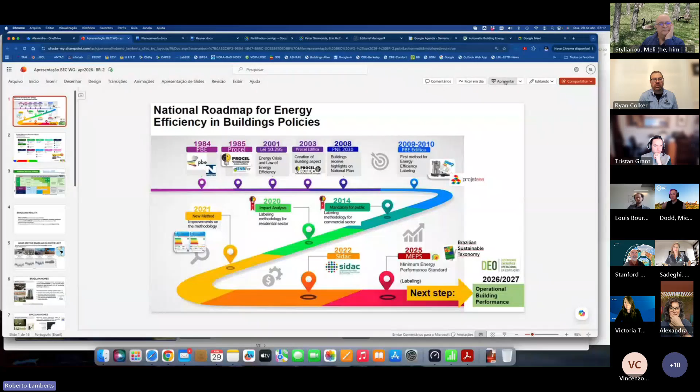Yep, Alexandra - oh thank you Lamberts. So we've brought our timeline about the implementation of our regulation policies. Although we've had a labeling program since the 80s in Brazil, it was only in 2009 and 2010 that we actually published the methodology for the energy efficiency label for buildings, and it was a voluntary program. But since last year, we've published a new regulation in 2025 that established MEPS, minimum energy performance standards, for buildings, and the instrument to demonstrate compliance with the MEPS will be the label. This label is conceived only for projects, after the building is built or retrofitted. We are also now working on a regulation or certification program for existing buildings, for buildings in operation - this is our DEO program, which is our next step.

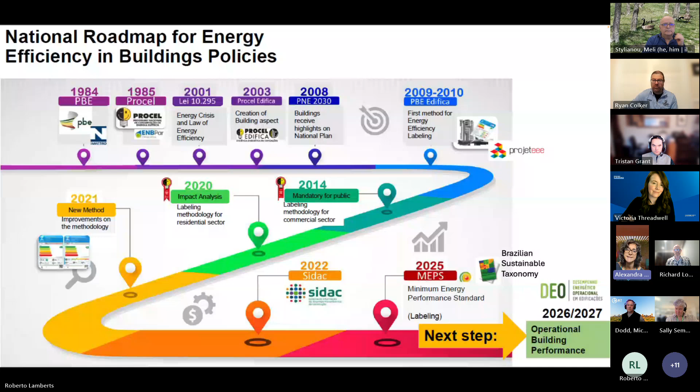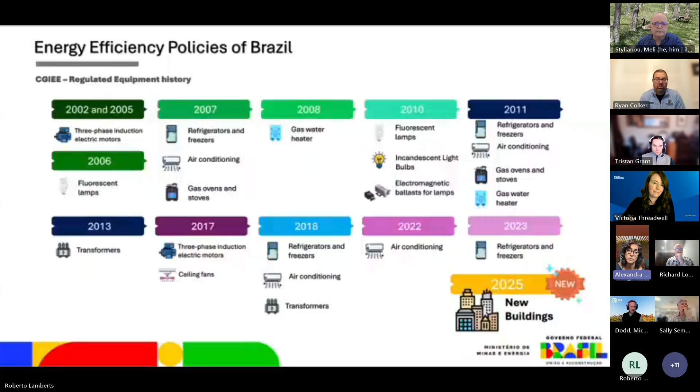Next slide please. This is our history on establishing MEPS for appliances and equipment here in Brazil, and it was the first time we established MEPS for buildings last year.

Next slide please. This is our timeline for establishing these MEPS. We are going to start with public buildings in 2027 - the MEPS for public buildings will be level A for energy efficiency. From 2035, this minimum standard will be NZEB, so the buildings will not only have to reach level A, but will also have to attend at least 50% of their primary energy demand with distributed energy, with renewables installed locally. For private buildings, the minimum standard, the MEPS will be level C.

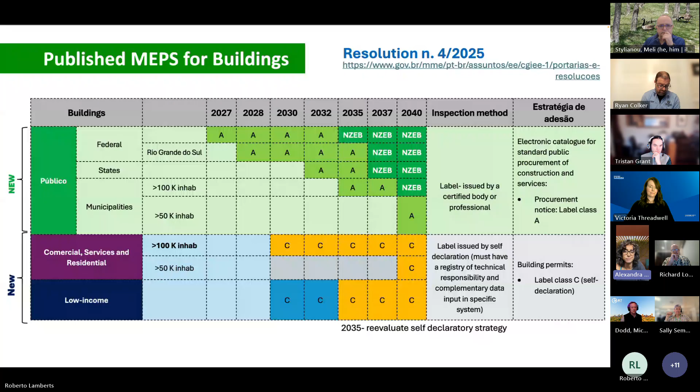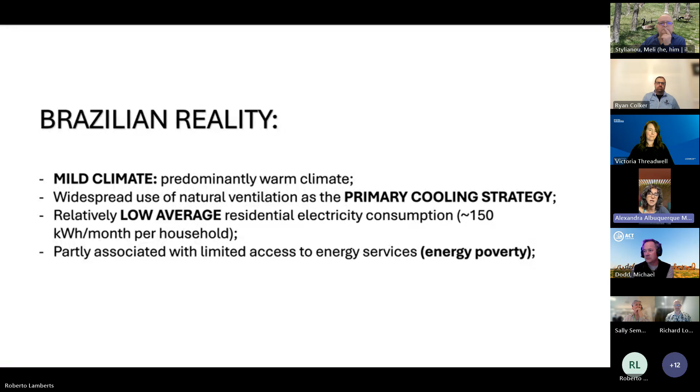This is just for you to understand our main scenario here in the country. Most of the country presents a warm climate, with widespread use of natural ventilation as the primary cooling strategy, and relatively low average residential electricity consumption, around 150 kilowatt hours per month. This is partially associated with limited access to energy services, related to energy poverty.

Our climates are very different because we are a very big country. We are the only country in the world crossed by both the equator and the Tropic of Capricorn. So in the south of Brazil we have periods of the year very cold, where we have kind of snow, if we can say that. And we also have desert climates in the northeast of Brazil.

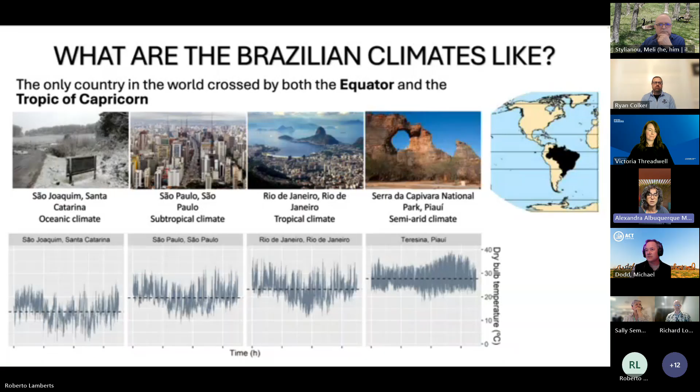Considering our housing sector, the envelopes are usually non-insulated. The low-income sector represents approximately 33% of residential buildings in Brazil. The most common building systems used are ceramic bricks in the walls, ceramic tiles in the roofs, but we also have concrete roofs and walls, fiber cement corrugated sheets, and single clear glass. All these systems are considered in our national standard for building performance, standard 15575.

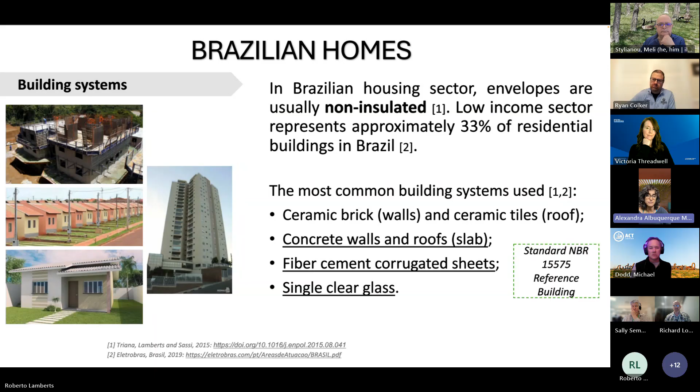There was a survey which was very interesting because it showed us that regarding cooling preferences, 89% of occupants here in the country prefer naturally ventilated environments at home, and air conditioning is mostly used during the night.

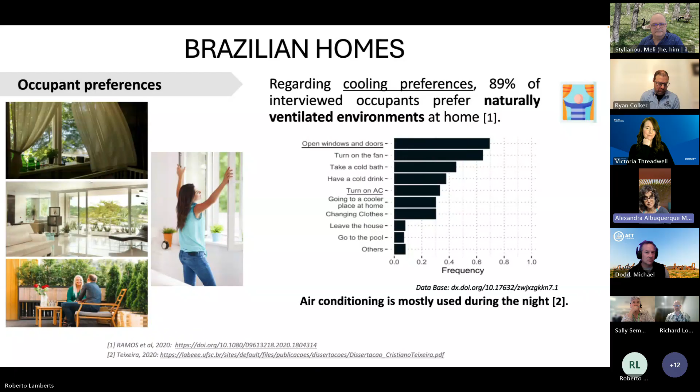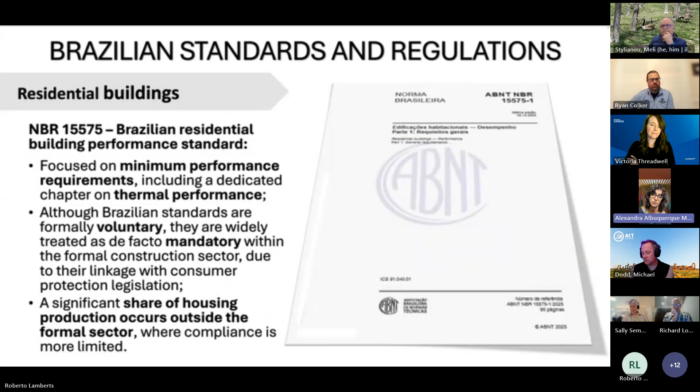Our national standard here in Brazil applies just to residential buildings. We are about to publish a similar standard for commercial buildings as well. This standard is focused on minimum performance requirements, including a chapter dedicated to thermal performance. Although the Brazilian standards are formally voluntary, they are widely treated as mandatory within the formal construction sector due to their linkage with consumer protection legislation. But a significant share of housing production occurs outside the formal sector, where compliance is much more limited.

We also have the label. Because we published last year this regulation that established the MEPs adopting the label as its main instrument to show compliance, the label is actually going to become compulsory, an obligation, because they will have to adopt this.

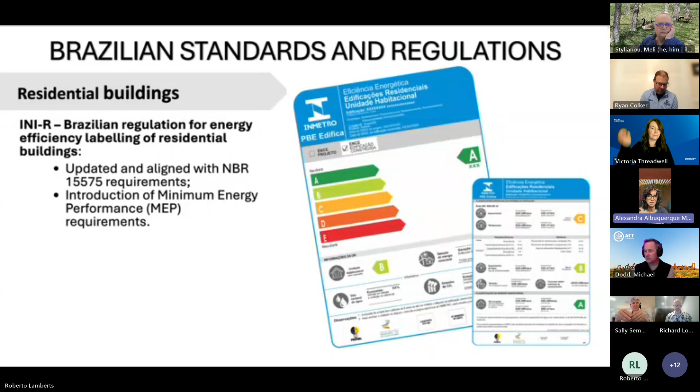Considering our national standard, there was a review in 2022, and in the thermal performance chapter we had some challenges to accomplish. We tried to make a description of occupant behavior when modeling hybrid strategies, because it was very important to consider the naturally ventilated period. So the simulations using a reference building had to integrate these different periods using natural ventilation and using air conditioning.

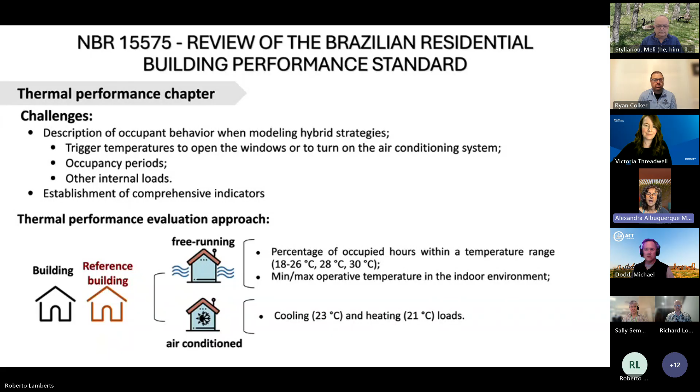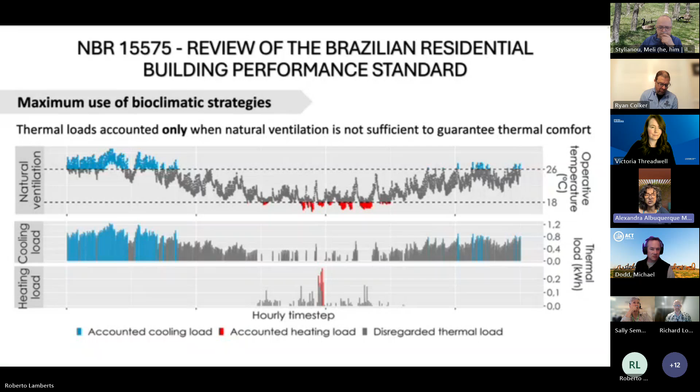We tried to use the maximum use of bioclimatic strategies, so the thermal loads are counted only when natural ventilation was not sufficient to guarantee thermal comfort. These are some of the strategies that we tried to integrate and use to make adjustments in this standard.

But we are still using, as the title says, the climate from the past, because we make the simulations using our climate data, not considering the changes that we are passing through. The acceptable indoor operative temperature limits are defined as a function of the annual mean external dry bulb temperature. The simplified adaptive framework adjusts thermal performance criteria according to the local climate, allowing higher indoor temperatures in warmer conditions. So we are very used to much warmer temperatures in our environments than you are used to.

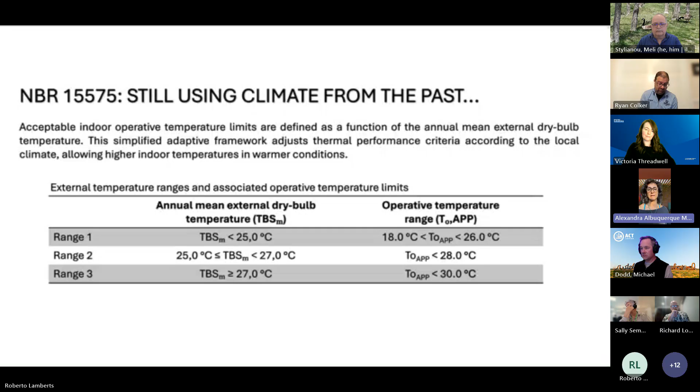We've brought some evaluations done in this study, where we studied three case studies with three different envelopes that are usually adopted here in residential buildings, using a human thermoregulation model to understand the difference between simulations using climate data and simulations using projections of the climate.

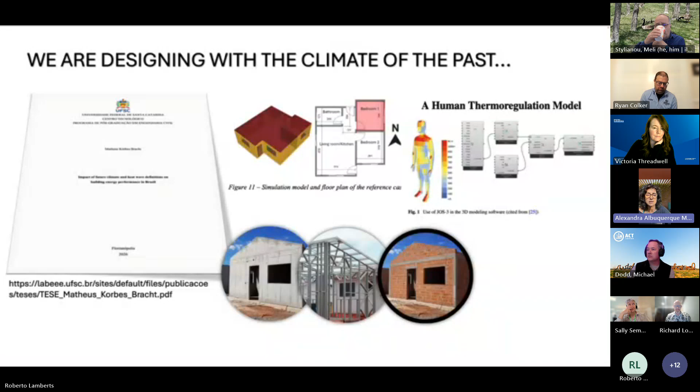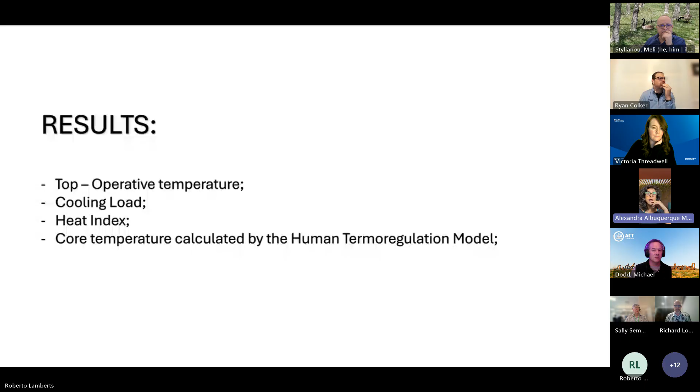We tried to understand the behavior of these case studies using as a reference four different indexes. And this is the last slide that we've brought to show to you today.

It shows the results of this evaluation that showed us that we have to make some adjustments in all the studies we proceed, and that will be used to adjust our regulations and try to make these evaluations using this future climate, because here we can see the big differences in these indexes when we use the history of our climate until now, and when we use these projections of future climate.

So we can see here the differences in these 3 case studies between these 2 different climates, like Brasilia, here where I am, which has a very mild climate right now, and Manaus, which is very hot and humid, and how it's going to be in the future by 2050. This highlights the importance of making these studies to design buildings considering the climate change we are going to face.

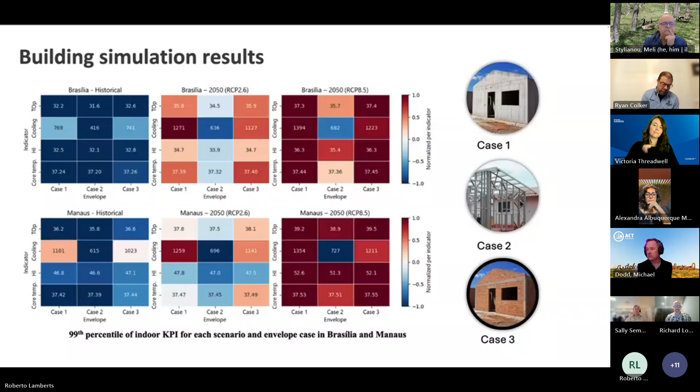So I think that's it. Thank you very much. We are here to discuss with you later.

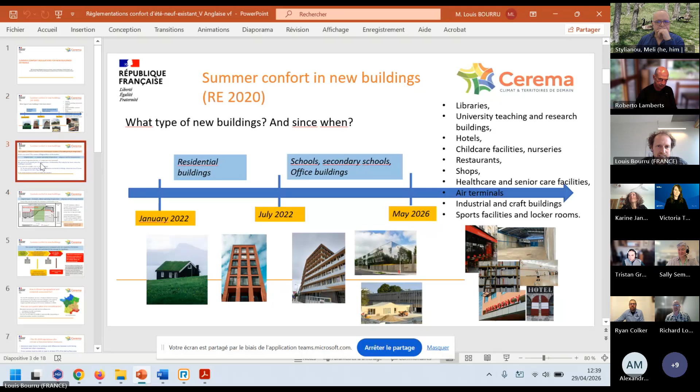So what is the metric we use for overheating for new buildings? First, our regulatory verification is based on simulation only during the design phase. We don't have measures like every country, I think. We use the number of degree hours of discomfort, which I will explain. It's a calculation for the whole year. We add all these degree hours of discomfort for hot periods, but only for the hours when the building is occupied.

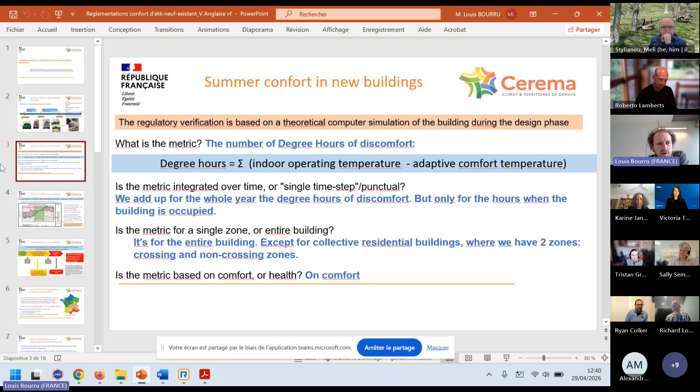We consider the entire building, and we have 2 zones only for collective residential buildings: a crossing zone and a non-crossing zone, regarding the openings and the natural ventilation. Our metric is based on comfort only, not on health.

So what are these degree hours? It's the difference between indoor operating temperature and an adaptive comfort temperature. Every hour we test if the situation is comfortable or not, and whenever the operating temperature exceeds the comfort threshold, we record the excess in our DH meter.

Our limit for comfort is adaptive only for days - it's between 26 and 28 degrees. At night we don't have the adaptive comfort, we put the limit at 26 degrees. Each time we exceed the comfort limit, we add the temperature exceedance, and by adding up the degree hours for each day, we get the annual degree hours.

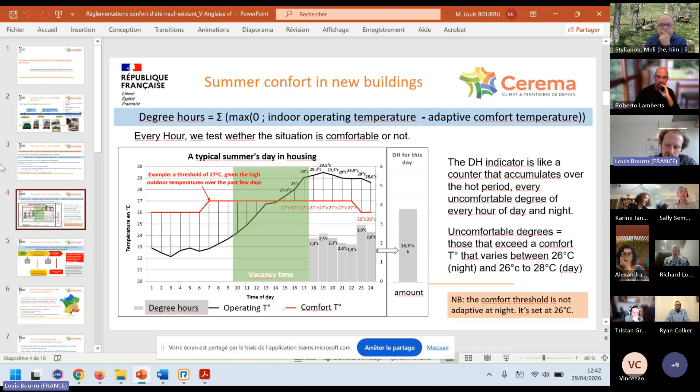This annual total of DH is compared with our two regulatory thresholds: 350 degree hours and 1250 degree hours. If your total is below 350, the building is expected to be comfortable during hot weather. If your total is above 1250, the building does not comply with regulations, and you must review the design before starting construction.

If you fall between the two - the yellow zone - the software will calculate a virtual cooling charge, a potential air conditioning consumption penalty, which will be added to our energy consumption indicator. This will therefore penalize you in terms of compliance with the consumption threshold. This is because we assume the user may eventually install air conditioning in the building at a later date. This consumption penalty is proportional to the amount by which the 350 degree hours are exceeded.

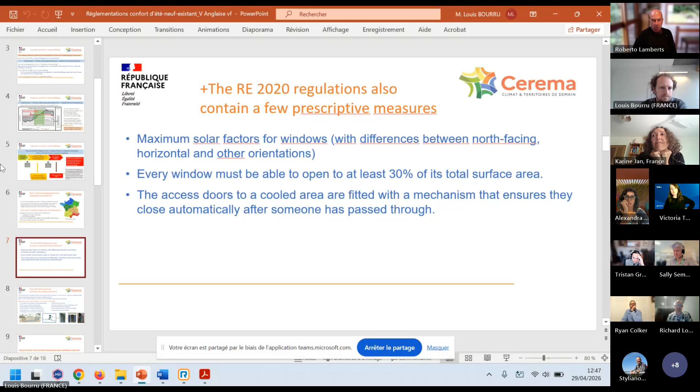We make these simulations on official software, and during the simulations the air conditioning is turned off, but the temperature simulation takes into account all the passive or semi-active systems installed in the building. This is new for us, because in the last regulations before RE 2020, these systems were not taken into account.

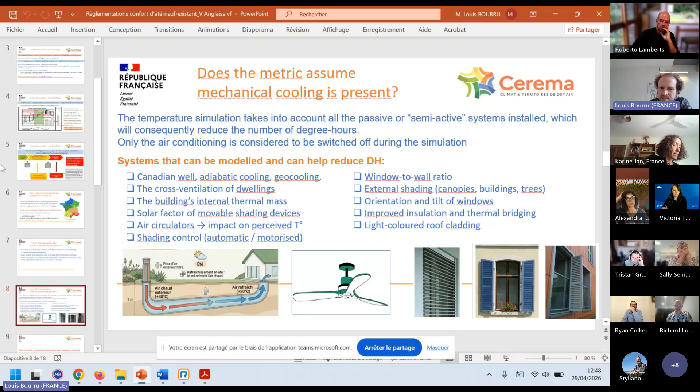So we have this system, we can use it now to reduce the degree hours, such as Canadian well, external automatic shadings, or geocooling, and so on. So now, Karine, if you want to explain existing buildings.

Yes, I will talk about the regulation for existing buildings, which is less modern than the part presented by Louis, because also in France we always start by regulating new buildings, and then we work on existing buildings.

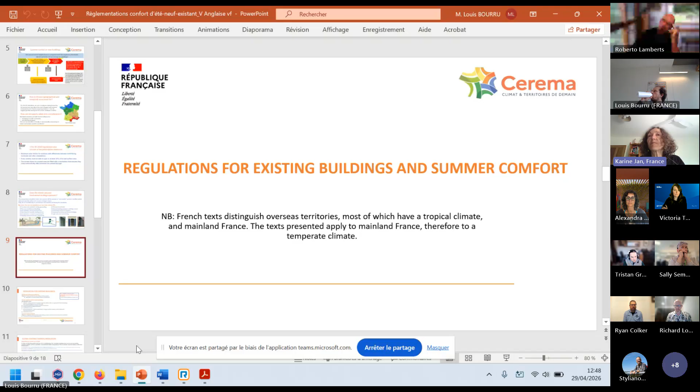Our regulation on global renovation is the method from before our last regulation for new buildings. So for existing buildings, we have several regulations.

We have the energy performance certificate, which is, I think, European - there are equivalents in Europe. It's an obligation to display performance when you are selling or renting a property. This regulation briefly points out the summer-related attributes of performance - you have or you don't have this attribute, and then you have points.

There is a thermal regulation for existing buildings, which has two modes of application. One is global, when there is renovation of a property, a large property with a cost of 25% of the building's value, and for buildings constructed after 1948, the period in France when construction became more industrial. Then there are several obligations I will detail later, but there is something global and also requirements of means.

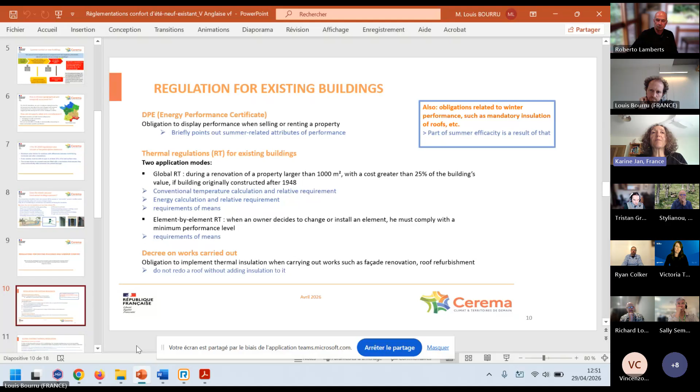Next slide. So the global existing thermal regulation for a project on a large building - the aim is to limit discomfort and to limit the use of air conditioning. So you have to ensure an acceptable summer comfort.

Conventional indoor temperature in summer must be below a reference temperature. The calculation of the temperature reached by the building is conventional - it's a calculation with a method, and this temperature must be below the reference temperature, which is the result of the same mode of calculation for the same building, but correctly protected, in terms of solar factor.

There are also obligations of means. For rooms intended for sleeping, the solar factor of openings must be below a reference, and new openings must be able to open over 30% of the surface. It's partly the same obligations of means as in the new buildings regulation.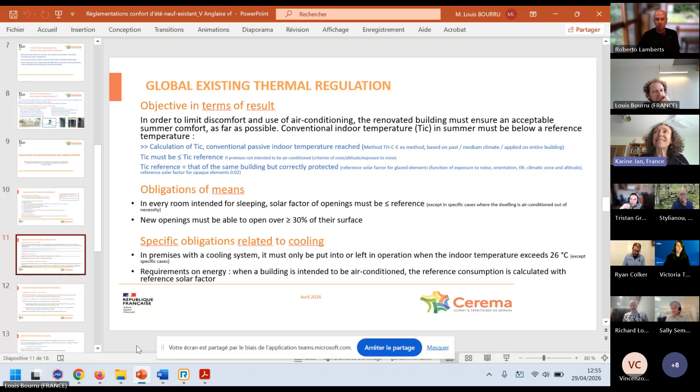Next slide. The existing thermal regulation element by element - the obligation is mainly on solar factors. The solar roof windows must be really protected, with a very good level of protection. And in case you install a cooling system, all equipment must be upgraded for solar protection.

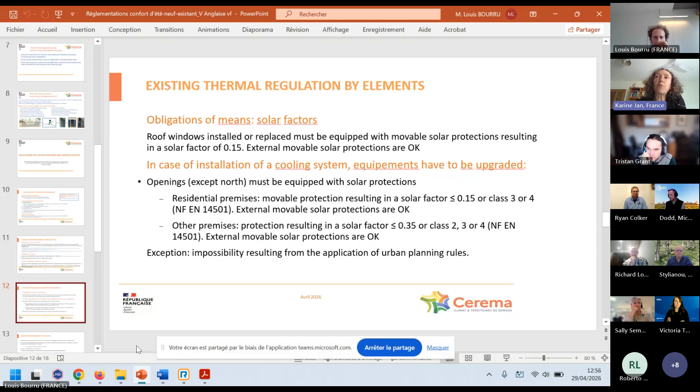The exception is for urban planning rules. In France, we have a lot of old buildings and a very strong defense of the architectural style of old buildings, so it's not always evident to put the proper protections in place. Next slide.

Thank you. And the energy performance certificate - it's the obligation of showing the efficiency level when you sell a property.

There's a list of dwelling characteristics. It's only for residential, for the moment, for the summer question. There's a list of dwelling characteristics that favor summer comfort, so you check if you have or don't have these characteristics. Then you have a level, on a 3-level scale.

So this is all for our continental, our temperate climate. We also have regulations for tropical climate, and what has been said about Brazil is very interesting, because we are dealing with those kinds of questions. For example, for continental climate, if we reinforce the energy performance certificate for summer comfort, it may induce reaction with air conditioning that doesn't show an insufficient performance. And for tropical climate, there are also questions about improving the building for a passive situation, or improving it for an air-conditioned situation. Thank you.

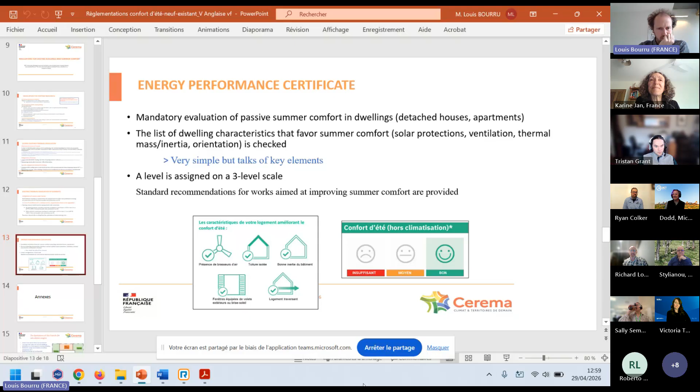Thank you, Karine, it was very interesting again. I noticed there is, before going to you Sebastian, a question from Richard. Oh, before going there, I didn't realize that the Earth Tube is a Canadian well. Interesting.

Rob, Richard asks, how do you account for humidity when using ground source cooling?

We don't, I think. I'm not sure. Humidity? For ground cooling, I don't think we do. No, for the moment we don't. We would have to redo the map of the climate regions for summer, because it was done mostly for winter. There are considerations about solar reception, but not more. Yes, there are parts of France where humidity may be a problem sometimes in summer, but we don't have climate modelizations that talk about this humidity in our regulation, and we don't have this for the future. There's no modelization of humidity for the future. Okay, in France. Thank you, Karine.

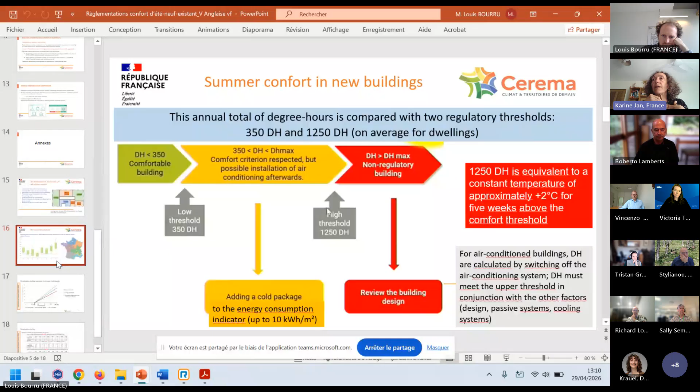For the existing buildings, you've seen the regulation is relative - you compare your building to a building which would be more protected. So the choice of the climate file is a bit less important, but yes, it would be better if we used climate files of the future. And it would be better if we use climate files for new or existing buildings of the future, with the urban heat effect included. I believe in a few years we will manage to do it.

I don't know if it's 5 years, but for new buildings we have a national database since 2022, and here you have the results for the different climate zones. It's very different from one zone to the other. Here in Nantes and Brittany we have the central H2A zone - it's very easy to manage the threshold. But in other zones like where Karine is, in H3, we currently are close to the limit often.

But when we build the regulations in France, we do a lot of simulations with different buildings and different parameters to be sure it will be affordable, technically and economically. So the thresholds are fixed with a lot of simulation before becoming a regulation. But we have sometimes surprises.

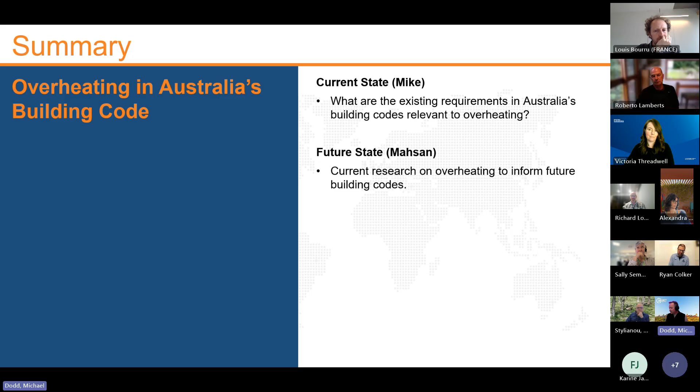So at a high level, in our building code, this is the current regulation - there's what we call a functional statement. H6F1 relates to residential buildings, and it says that a building must improve occupant health by mitigating the impact of extreme heat and cold, and when there is an energy blackout, so if there is no power to the house. That's talking about the passive elements of the house - insulation in walls, performance of windows, and orientation and the like.

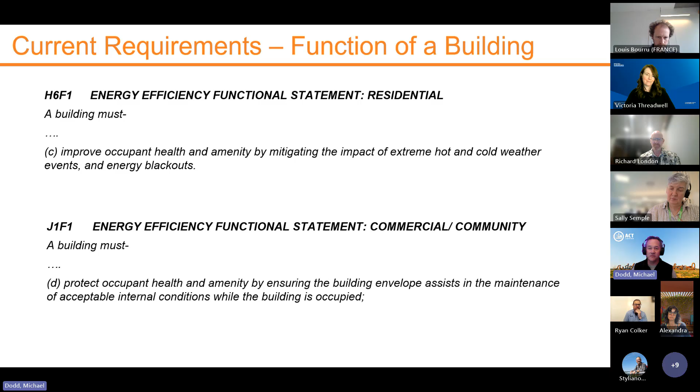It's a general principle that's there in the building code, which the other regulations try to meet. And then for commercial and community buildings or public buildings, again there's some similar wording, which is about maintenance of comfort - really, maintenance of acceptable internal conditions when the building is occupied.

So this is an overview of the residential building requirements. I guess up front I should say there is no overheating requirement within the Australian Building Code - there's no requirement for the building to not overheat. All of these measures I'm talking about are within the energy efficiency requirements, and really energy efficiency requirements to reduce greenhouse gas emissions and reduce energy costs for occupants is used as a proxy for preventing overheating.

Australia has 8 climate zones, just like France, which Mahsan will go into a bit more in her presentation about where they are in the country. You have a differential requirement depending on which climate zone you're in, which is a very common approach. Australia has a wide range of climates from tropical to alpine, with everything in between, from hot desert climates to humid climates. So there's a great range in our building code to respond to all of those climates.

For residential buildings, when we're talking about the modeling that is used to predict how much energy a house will use and what temperature it will be, we've used past climate files. These were updated recently to take into account the most recent few years, but there's still a backward-looking climate file and weather file that was used to both develop the provisions and what's used in our energy modeling process.

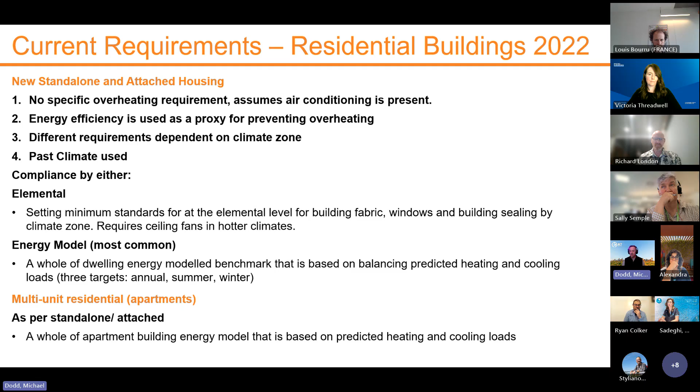In commercial buildings, again, there is no specific overheating requirement, and energy efficiency is used as a proxy for overheating. Minimum standards for the elemental building fabric is similar for residential, but there are more prescriptive requirements required around the air conditioning system used in the building.

So above a certain size, a building is required to have a night purge facility, so it can eject hot air from that building when the building is not in operation overnight. Economy cycles that draw in cooler fresh air are mandatory, but that's more of an energy efficiency requirement. And the more sophisticated your building, the more sophisticated the heating, ventilation and air conditioning controls are required to be.

Most of the commercial and public buildings in Australia will be cooling dominated, so most of their energy will be used for cooling. Partly because of that, most of our commercial and public buildings are required to have light coloured roofs as standard.

The provisions for commercial buildings have just been updated. In fact, they'll be made available for use here in Australia in 2 days' time, on the 1st of May. They won't become mandatory until the 1st of May in 2027. But these new provisions were developed using a future average climate file, so representative concentration pathway, RCP 8.5, 2050 was used to develop our provisions as they will become the minimums going forward.

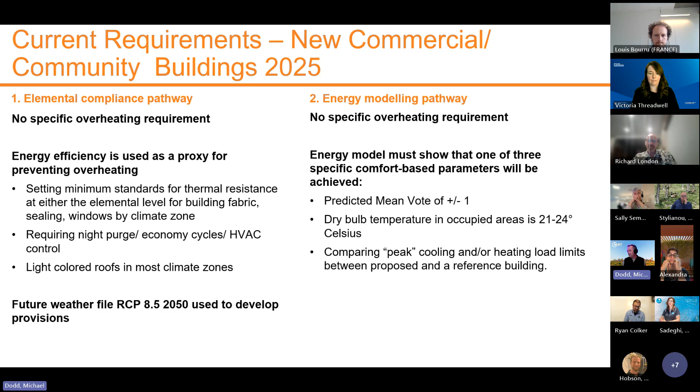The file this was based on was a future heatwave file. This is for Melbourne, which is one of our larger southern cities. It has a very big diurnal range, so in the wintertime it gets temperatures below 0 overnight, but in the summertime it has temperatures above 40 degrees. So it's a very dry heat. And this modeled a 7-day heat wave.

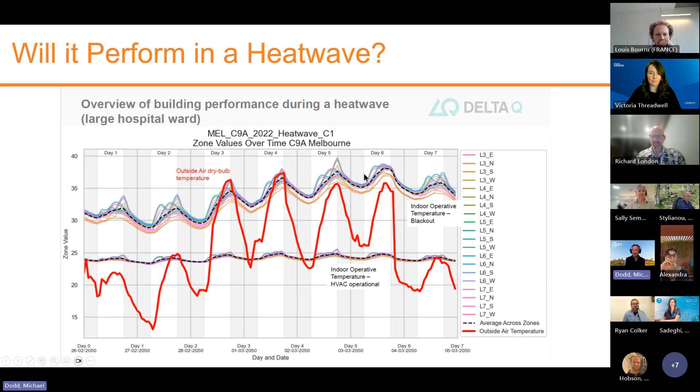So as Michael mentioned, CSIRO is leading a research to develop a residential overheating model for Australia. The objective of the project was first to review the existing international standards and national building codes, then to identify gaps and limitations in current guidelines, and finally to develop a residential overheating model for Australia to be included in the code.

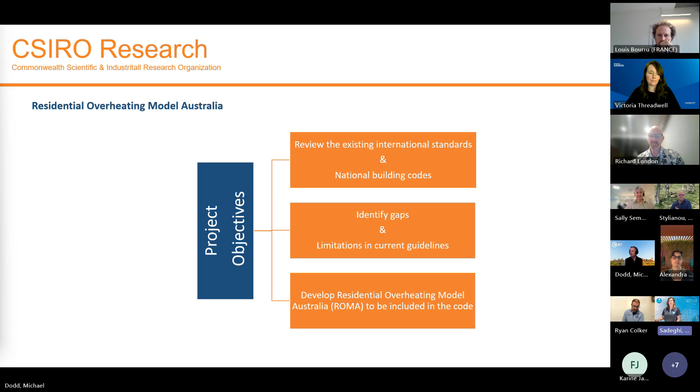In each standard, we looked at the metrics that have been used, and the indices used in these standards. We also identified the threshold limit that each standard has, and the thermal comfort model, for example whether the model is static or adaptive. And we looked at the building type and building operating system.

We also looked at the national building codes of all those countries that are already including overheating and thermal comfort standards in their building code, for example Belgium, Germany, France, UK, Netherlands, and others. We looked at the standards used in these countries, the indices they used, the threshold limit, the thermal comfort parameters included in the building code, and also whether the code is sensitive to occupants' adaptive response, and what the building types and building operation systems were.

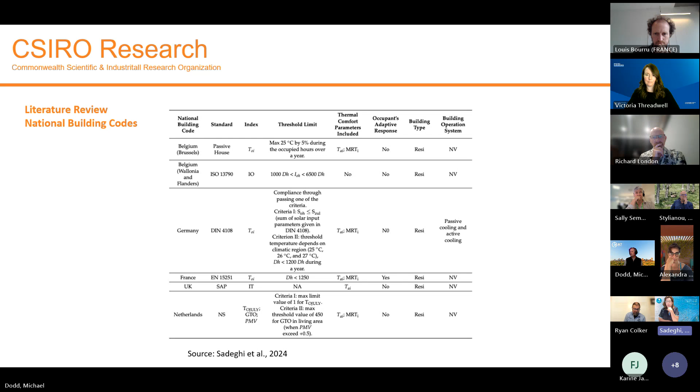So this paper is published, and you can have access to it online. If you are interested, I can give you the details about that.

So the key lessons that we have learned from the literature review - based on these lessons, we have developed our overheating model and criteria based on 3 scopes.

First, the model is an adaptive model, which is sensitive to climate and also sensitive to occupants' adaptive behavior. The index that we are using is SET star, which includes 6 parameters: 4 environmental parameters, including air temperature, mean radiant temperature, relative humidity, and indoor air speed, and also 2 personal parameters, namely clothing value and metabolic rate. The metric that we are using is degree hours.

This is very similar to France, what Louis presented. We are using the sigma degree hours, which quantifies intensity and duration of exposure to heat stress.

As the national project, we collaborated with 5 Australian universities, and each university was responsible to collect measurement data and conduct a field study for us in 1 or 2 Australian climate zones. We managed to collect data for 7 Australian climate zones.

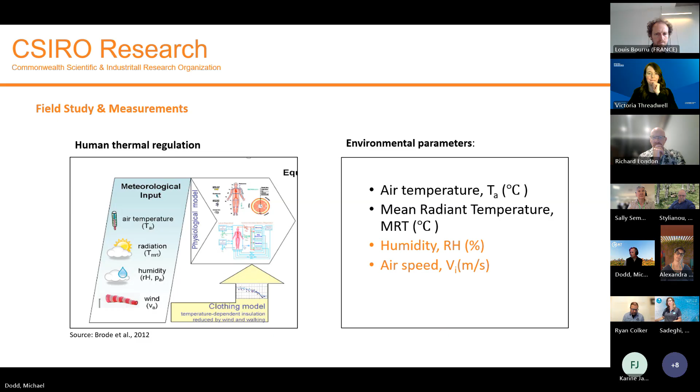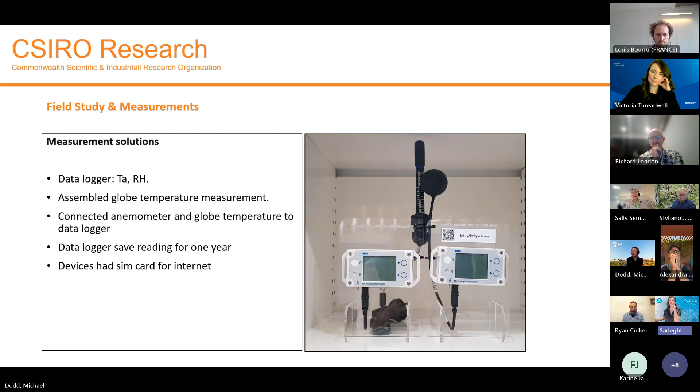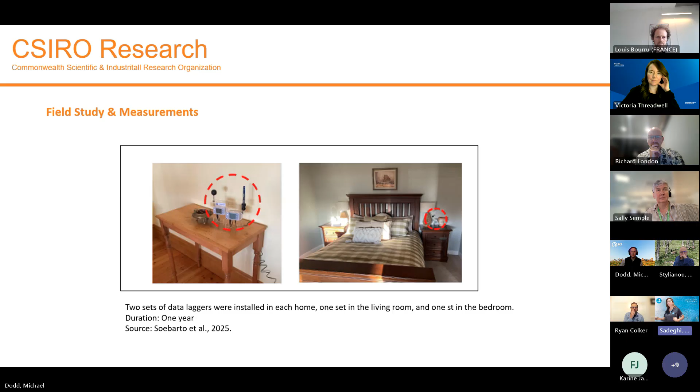Next slide, please. So as you can see, this is a photo of one of the studies we did, and we published a paper on that in 2025. Two sets of data loggers were installed in each home, one set in the living room and one set in the bedroom. I think this slide can answer one of the questions in Melly's email about which zones are included in the metric. For us, we are looking at two zones, the living room and the bedroom. Next slide, please.

We also had questions about occupants' adaptive response—when they feel warm, what do they do? They open their window, use the ceiling fan, or use shading or blinds. So all of these adaptive behaviors were recorded. We had all of this information and data in terms of environmental data and thermal comfort surveys, and with all of this data we were able to calculate our SET star. Next slide, please.

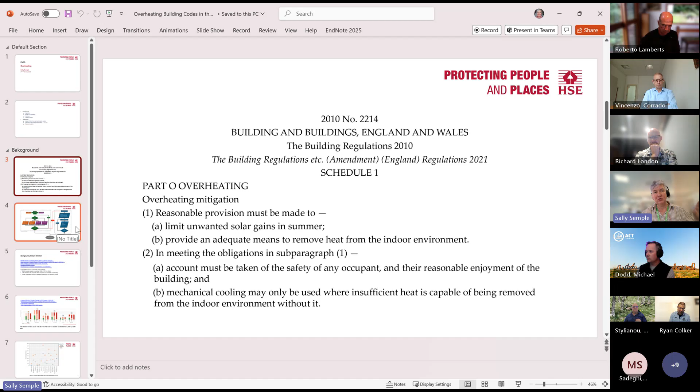So within the building safety regulator, we are responsible for providing guidance that allows people to comply with these regulations. Guidance was developed providing two main routes to compliance - this was supposed to be an easy to follow flowchart - known as the simplified method and the dynamic method, and they are quite different.

The simplified method is designed to ensure that elements of your building are in place, mainly focused around limiting solar gain through glazing. They limit the amount of glazing you can have, particularly on the south and west facades. They also look at your ability to purge your dwelling of heat, particularly overnight - that tends to focus on openings and glazings within your bedroom area.

Although this is presented as a flowchart with two different colors, it's got orange for high risk areas, which essentially means London, because that's how our temperature zones work, and moderate risk is everywhere else.

The requirements we have, although listed as physical requirements, are exceptionally difficult for buildings to actually comply with. In practice, it is quite rare for buildings in high-risk areas to be able to comply with those requirements.

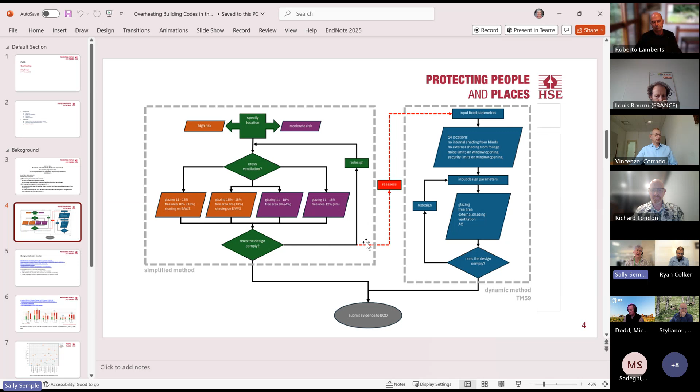Then I've got - this was prepared for some of the major house builders - just looking at what the background to overheating is.

As a note, on the excess deaths in summer 2022, the ONS, the Office for National Statistics in the UK, has just started releasing information about where those excess deaths occurred, because there was a presumption previously that most were in hospitals or care homes with vulnerable people. Actually, half of those excess deaths occurred within private homes, and some predictions related to the rise in climate change happening faster than anticipated in the UK suggest those excess deaths, approximately 3,000 in 2022, could be up to 10,000 by 2050.

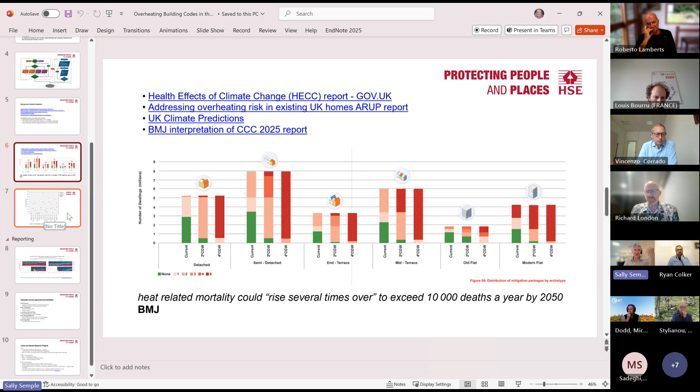Then just having a look at the predicted changes in temperatures. The TRY refers to test reference year - it's not the design summer year, but they're related. This is looking at cooling degree days based on the current test reference year used for building design, and we've just got a revised set of reference years published, with results for the predicted future. I think the technical term is it's horrific. It's fine for me, I'm in London at the minute but actually based in Edinburgh - as you can see, Edinburgh and Glasgow are fine, but in London it's going to be bad. It's bad now, and it's going to get worse in future years.

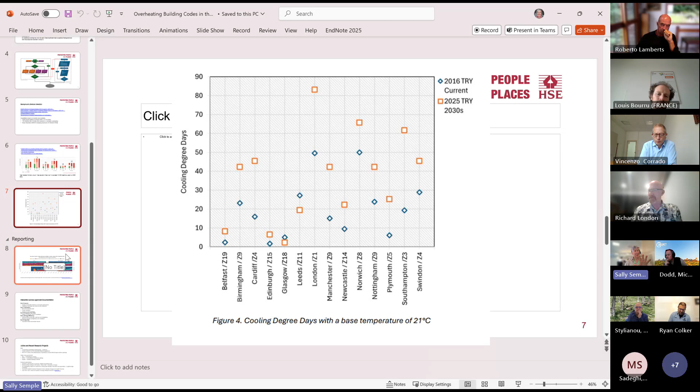This slide then goes - apologies for the fact this rather jumps around in its narrative - I was then having a look at the impact of the introduction of the building regulations that came in 2021 and were in place.

Did we lose Sally? Yeah, she's frozen for me too. Oops.

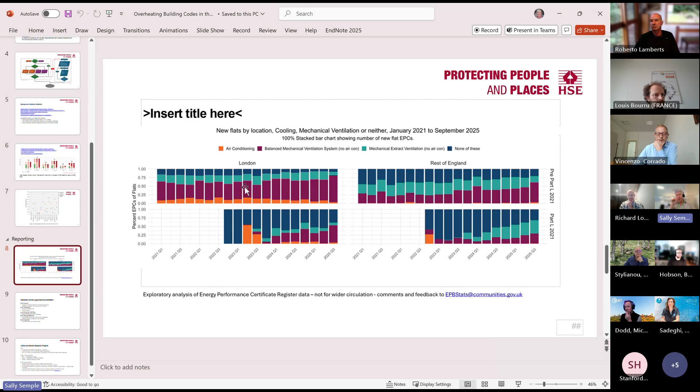We are monitoring what's actually happening in the built environment with new buildings, and this does have relevance to other aspects in terms of opening windows. There is interaction across our guidance, as we organise it around the parts of the building regulations themselves. So there's interaction between all of our guidance, particularly with Part E sound. We don't assume your windows will be opened if there is traffic noise outside.

There's also the interaction with Part F ventilation. Increasingly, we are requiring background ventilation in buildings that are highly sealed. In highly sealed buildings, we're requiring you to install mechanical background ventilation.

And also we've got one that's reasonably contentious: protection from falls. If you are using a window for bedroom ventilation, for overnight ventilation, we require a high guarding level. There has to be a guarding level of 1.1 meters, which is relatively high and higher than is required for an opening window in, for example, your sitting room.

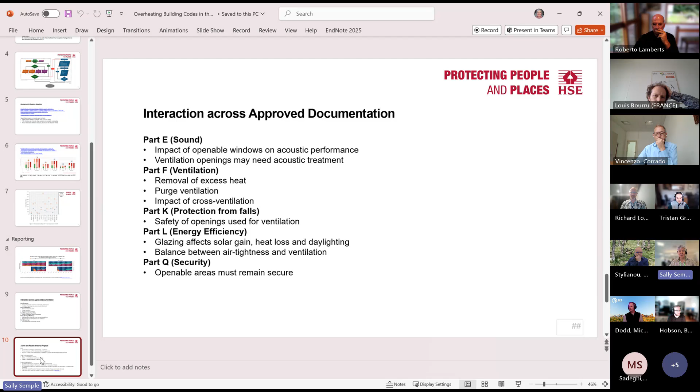The final bit with this was just to look at our active and recent research projects. Within the Building Safety Regulator, we've got a number of research projects underway. We also have one not mentioned here because...

it's a new form of regulation, a new form of guidance. It was only introduced in 2022. We're just now starting to look at the impact of this and how it's explained. And we've got changes in the design summer years. There's a new set of design summer years that have been published, and climate change is happening much faster than was anticipated when this guidance was drawn up.

So we've got a major review of all aspects of the overheating guidance starting this year, and we would expect to produce results, recommendations for improvements to the guidance, possibly improvements to regulations, but definitely amendments to the guidance, in late 2027. So yes, that's the end of the presentation.

Thank you very much, and thank you for being ready on such 5-minute notice. You're very welcome, I'm poised ninja-like to be able to present on overheating at any given moment. Nice, very nice, thank you for this.